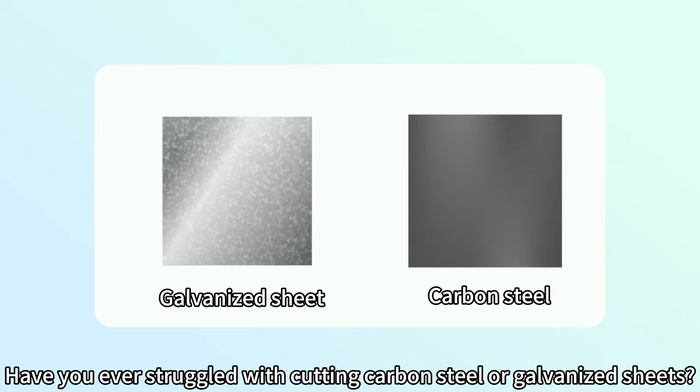Have you ever struggled with cutting carbon steel or galvanized sheets? As the cutting settings of these two materials are similar, this lesson will take carbon steel as an example to show you how to cut these types of materials.

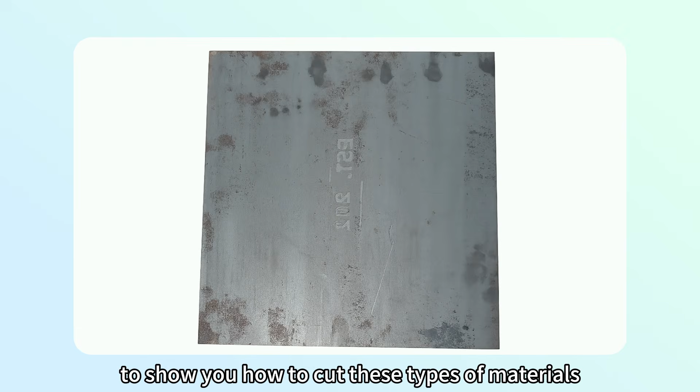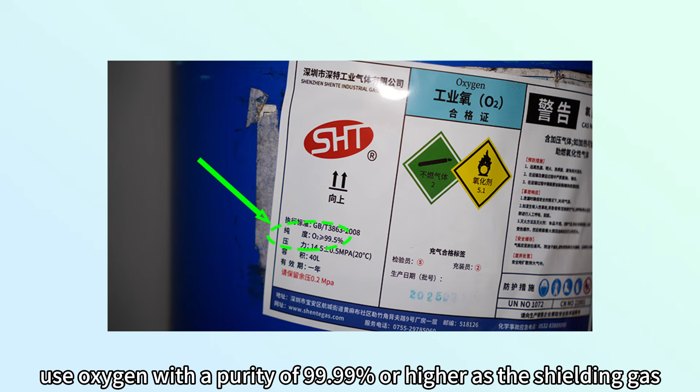To cut 2 mm or thicker carbon steel and galvanized sheets, use oxygen with a purity of 99.99% or higher as the shielding gas. Employing other gases may cause dross or incomplete cutting.

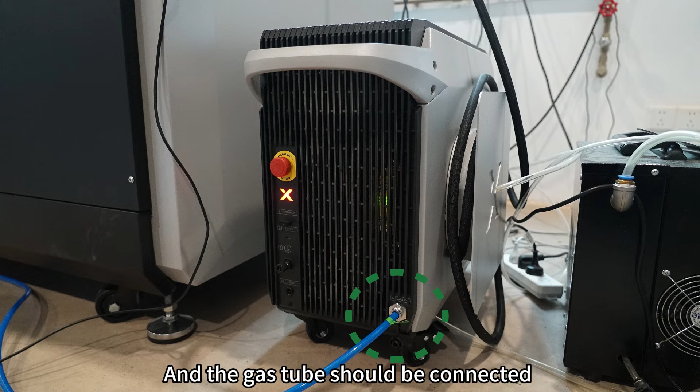As shown in the video, the gas supply requires an oxygen cylinder, a flow meter, and a proportional valve, and the gas tube should be connected to the main unit's shielding gas inlet.

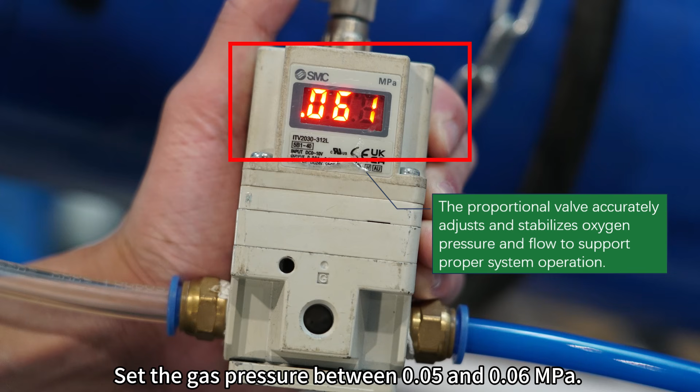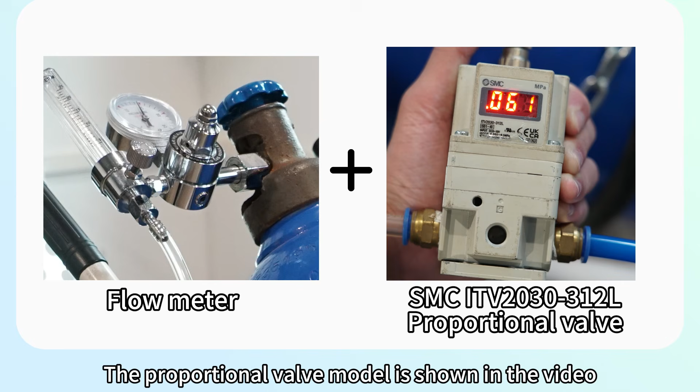If you're using the 1200-watt xTool metal fab laser welder, set the gas pressure between 0.05 and 0.06 megapascals. Slight variations are acceptable. Here, we use a flow meter and a proportional valve to adjust the gas pressure to the required range. The proportional valve model is shown in the video. Alternatively, use a gas pressure regulator like the one in this video.

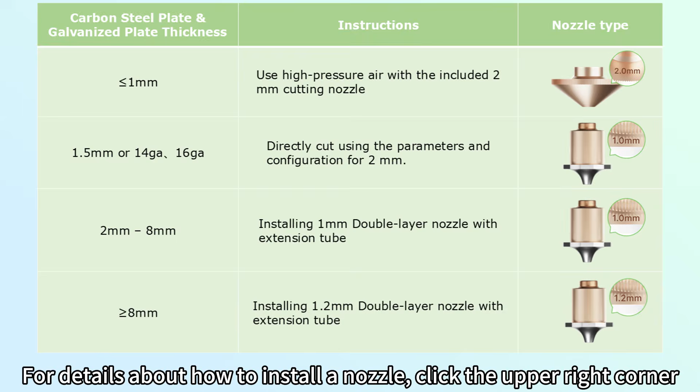Next, select a proper nozzle according to the table. For details about how to install a nozzle, click the upper right corner. Then, put the material in place.

This video takes 5 mm carbon steel as an example. Use the fixtures on both sides to secure the material.

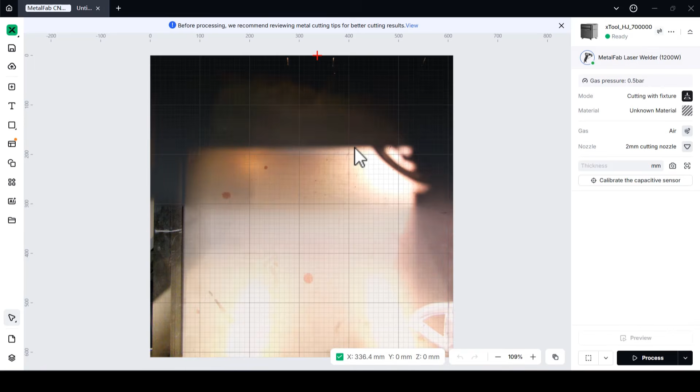Open xTool software and connect the device. Open a project file for cutting.

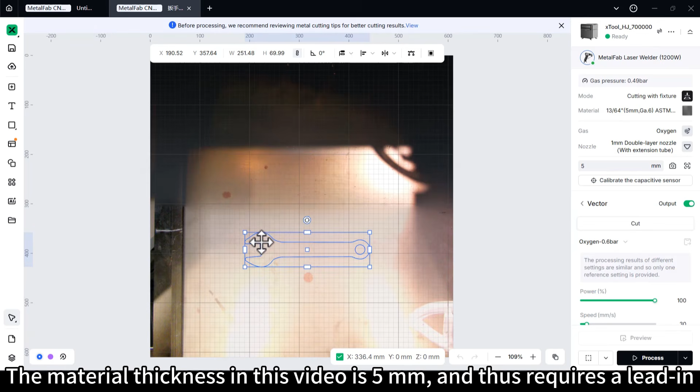For optimal cutting results, add a lead-in for carbon steel or galvanized sheets thicker than 2 mm. The lead-in ensures smooth and complete cutting of the contour and leaves the cutting defect outside the workpiece. The material thickness in this video is 5 mm and thus requires a lead-in. The following will show you how to add one.

xTool software can automatically generate a lead-in. The lead-in length is usually 1 to 3 times the material thickness. To cut the interior part, add a lead-in inside to avoid workpiece damage.

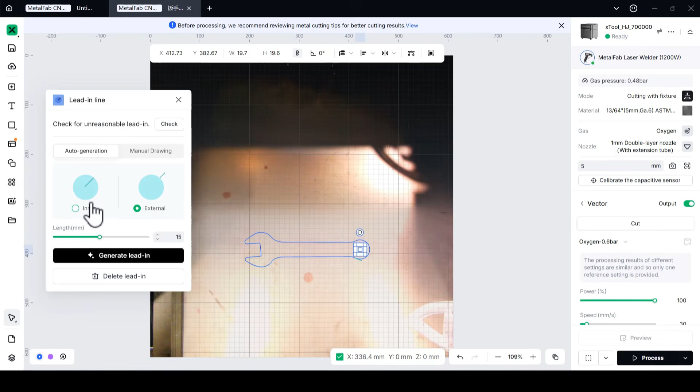Alternatively, we can manually draw one.

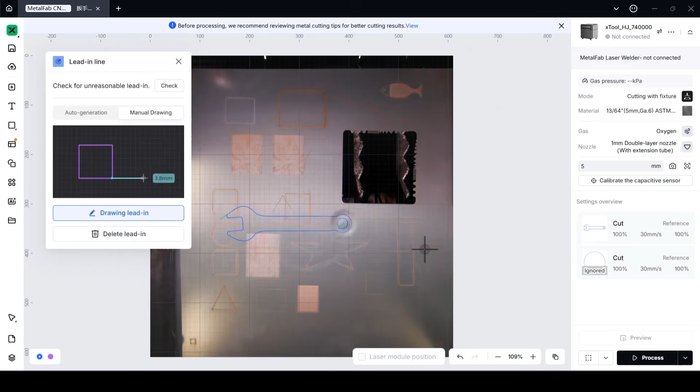After adding the lead-in, set parameters for cutting. xTool software provides varied types of carbon steel as the processing material. Select one that matches your material grade and thickness.

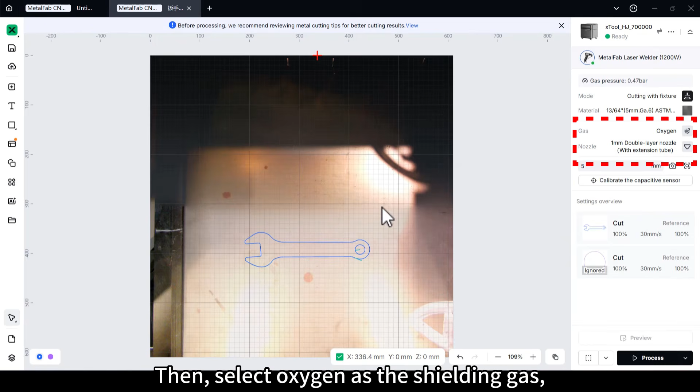Then, select oxygen as the shielding gas and a 1 mm double-layer nozzle as the processing nozzle. Next, click Calibrate the capacitive sensor. Click a solid area on the canvas and wait until the calibration is done.

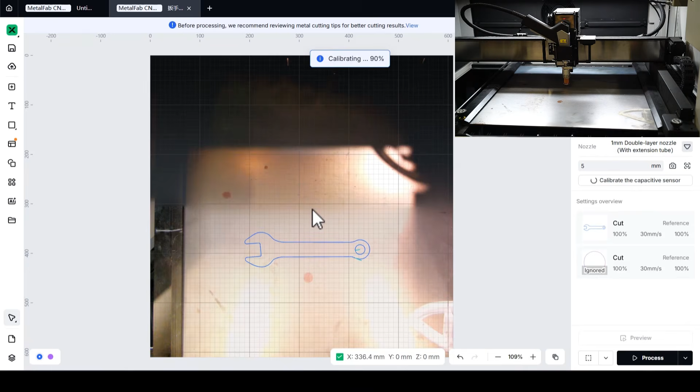Then, preview the precise cutting position using the framing or the close view function. The framing function is used in this video.

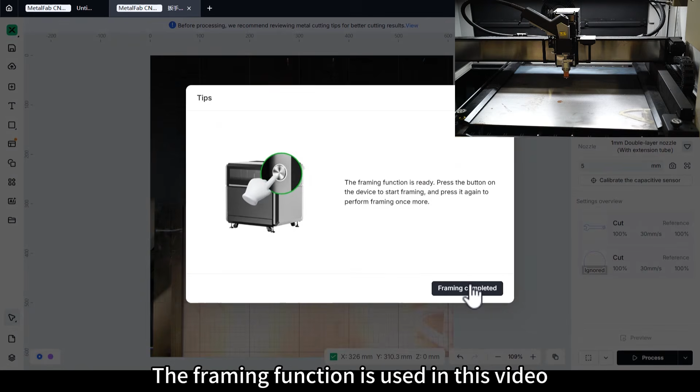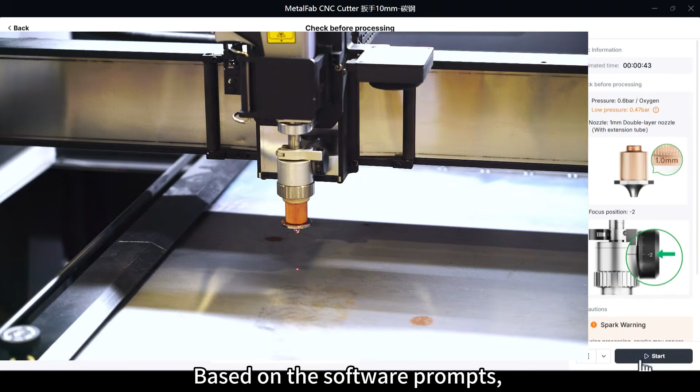Before processing, adjust the focus position, as the wrong focus position can lead to incomplete cutting or dross. Based on the software prompts, the welding head scale for our material should be adjusted to -2. The following shows the adjustment process.

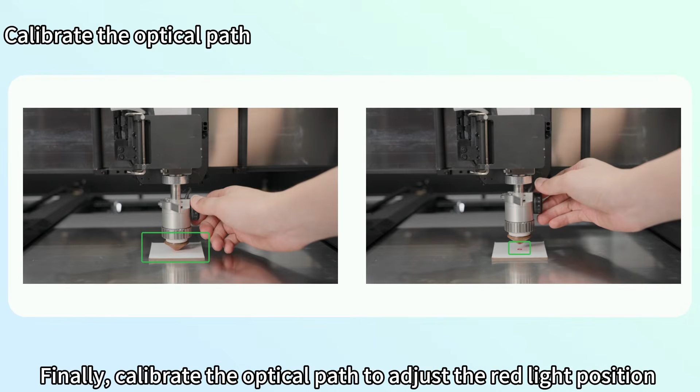Finally, calibrate the optical path to adjust the red light position due to the added extension tube and changed focus. Always adjust the optical path last for optimal calibration. For details, click the upper right corner.

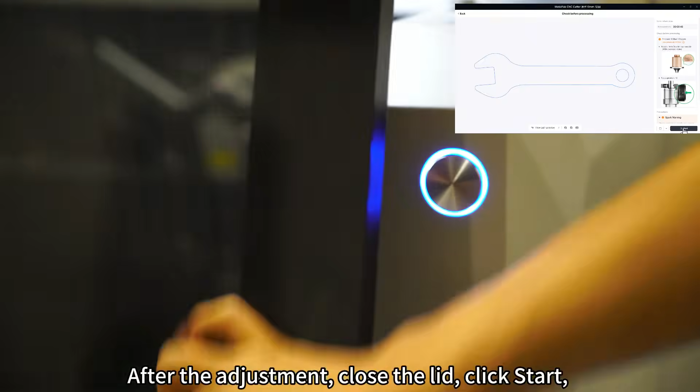After the adjustment, close the lid, click Start, and press the button on the device.

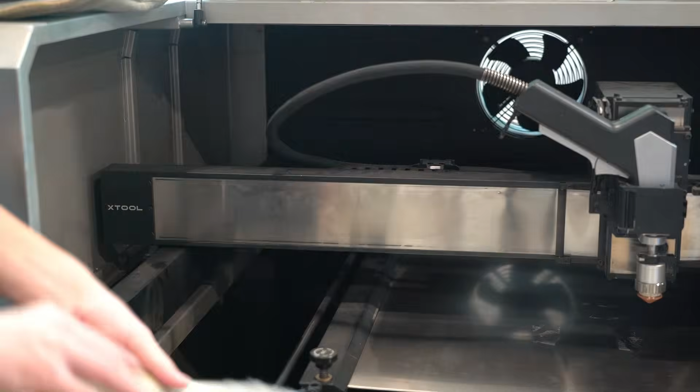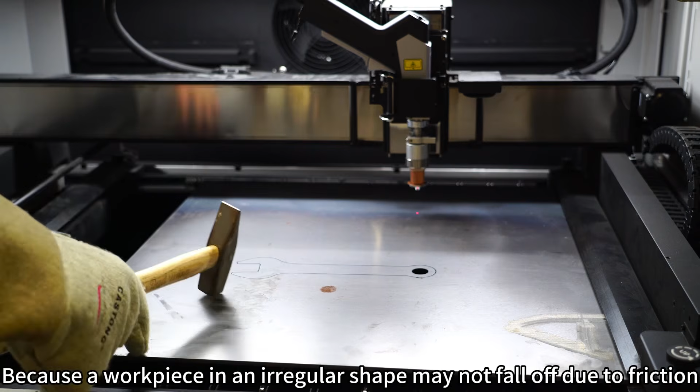The workpiece is very hot after cutting. Wear heat-resistant gloves before touching it. In addition, you're advised to bring a small hammer because a workpiece in an irregular shape may not fall off due to friction. In this case, use a hammer to knock it off.

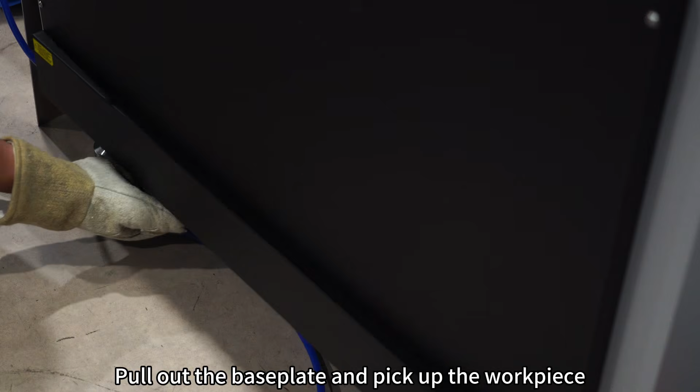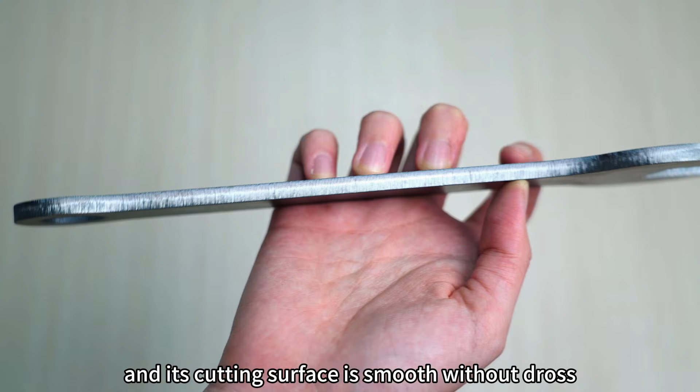Pull out the base plate and pick up the workpiece. Look, this is the workpiece, a carbon steel wrench. The wrench is cut through in one pass, and its cutting surface is smooth without dross. Let's see if the wrench works.

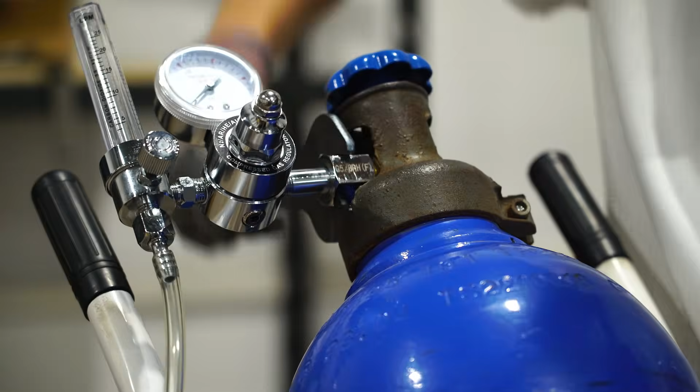Here are some tips for better cutting results.